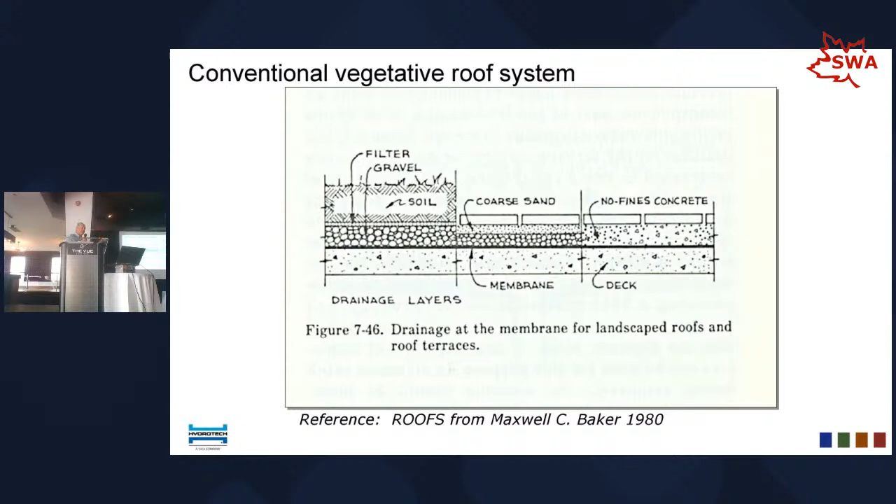So basically, vegetated roofs are not new. You got that from an old book. There's like the roofing Bible in Canada, Roofs from Maxwell Baker, written in 1980. Is it 1980? Yeah. And you can notice that the membrane is on the deck. So that concept of membrane directly on the deck has been around for a long time.

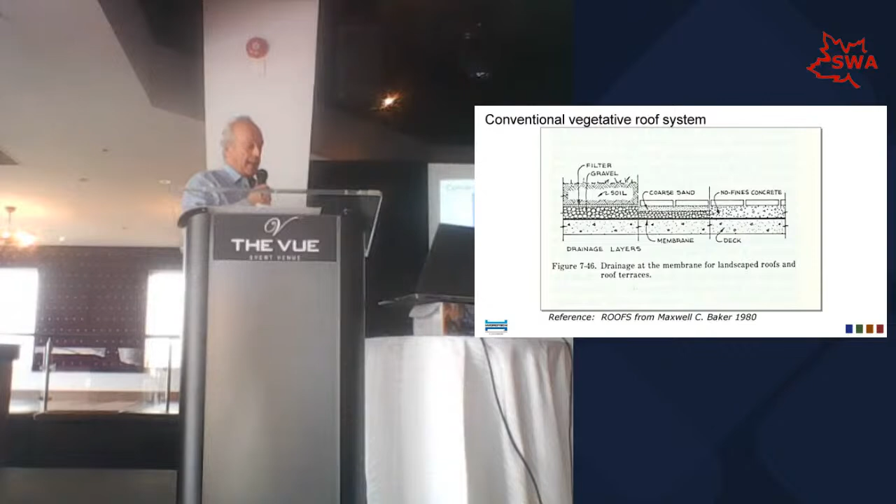Now, the extensive green roof, these are technology that we imported from Germany in the late 90s, like in 1998. So it's nothing really new. We just take all the knowledge from the Germans that they built up over all these years and we made them into a Canadian way. And that's been doing the work for the past 30 years.

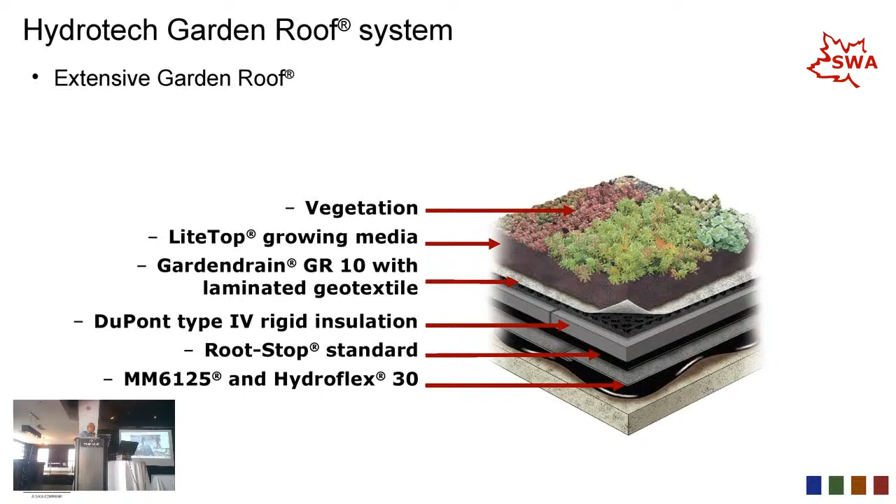Here again, the product we use mostly is rubberized asphalt. It's a monolithic seamless membrane, and when we talk about roofing membrane, we talk mostly about a waterproofing membrane. There's a difference between a waterproofing membrane and a roofing membrane. The waterproofing membrane is designed to sustain hydrostatic pressure for its design life.

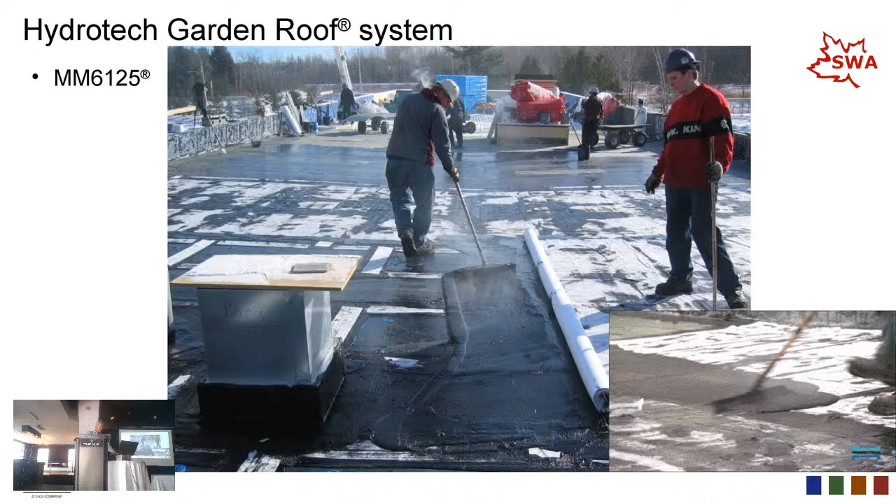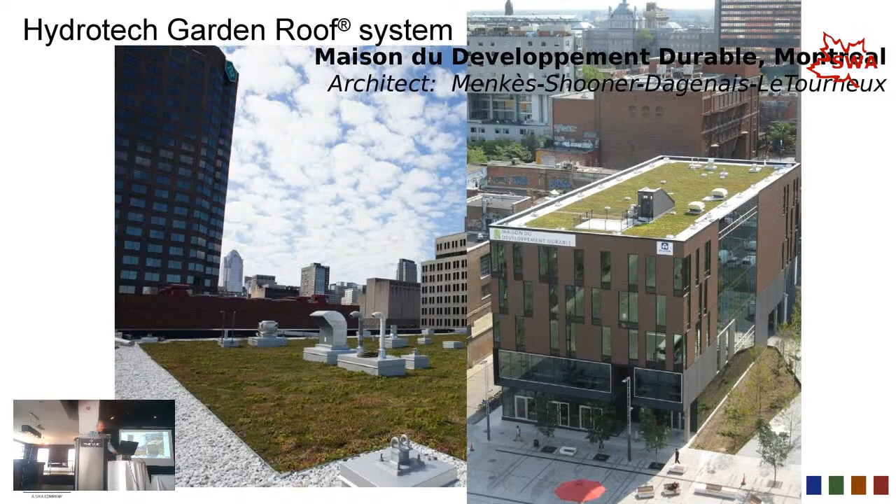First thing is training, okay, in your specification. For those who are writing specification, in the first part of the spec, we need qualification. So make sure that the contractors that will be installing the vegetated roof understand the vegetated roof: the roofing contractor, waterproofing contractor, and the landscaping contractor. So this is key for success. And now I'm going to show you some failure.

So you can negotiate with the contractor, but you cannot negotiate with nature. If nature doesn't get what it needs for the plant to thrive, it's going to die, and you're going to have this type of situation for the rest of the project.

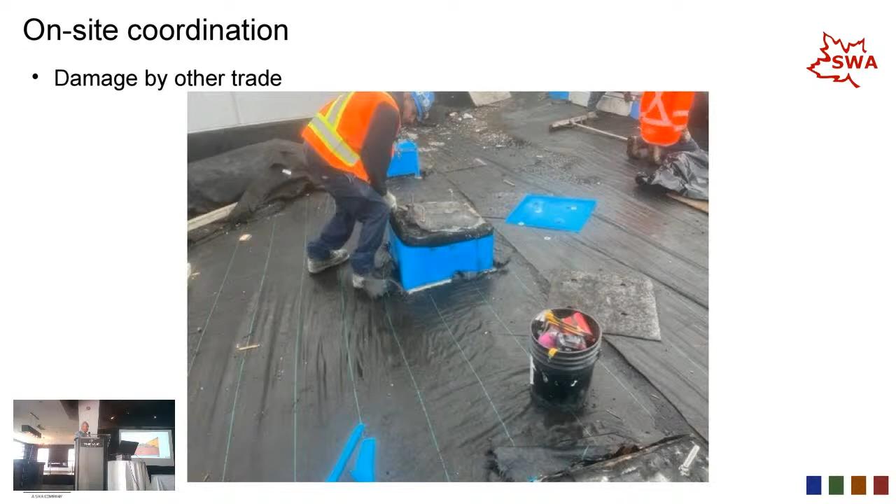Because they're gonna come up with scaffolding, the bricklayers, and ruin the vegetated roof. And this is what happened. And then we had to restore. We were able to save that roof, but at a lot of expense. So I want you to not do this again.

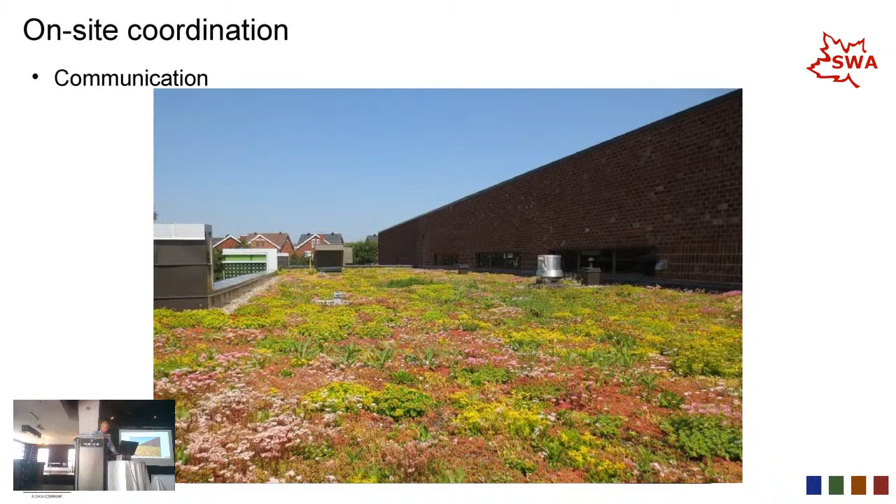Same thing here, downtown Montreal. We did that roof. It was nice and beautiful. We maintained that roof for a full summer, very intense at the beginning of the vegetated roof. Then in the fall, some other trades came in and they used it as a laydown area to put all their equipment and labor and so on.

And the next spring they called me and said, Denis, your roof is dead. I said, how come? So I went up to the roof and it was totally dead. So we needed to restore that roof. So keep in mind that the vegetated part is the last thing to go down, because these are costly mistakes. Here again, we were able to salvage the roof, but it was expensive.

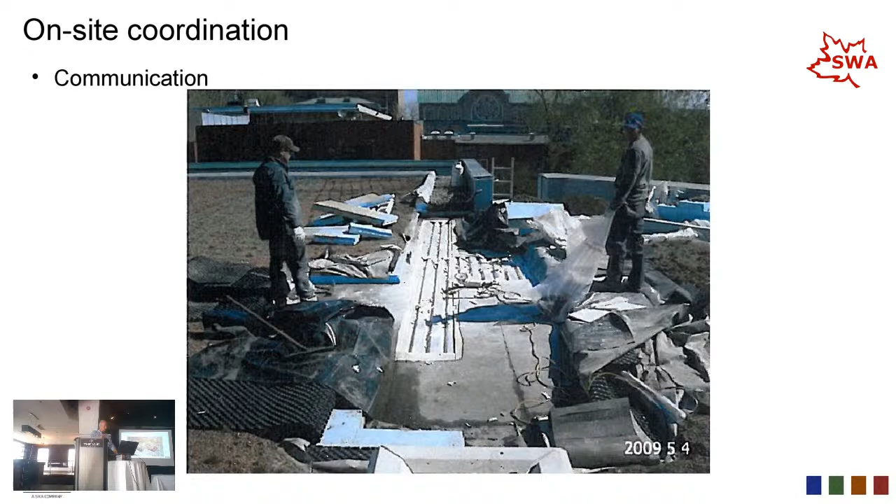This one is another one where the contractor had to put down a drainage board, and these drainage boards come in rolls, and they have a memory, they come back, so he took the initiative to nail it down. So he used nails, and of course the nails were longer than the insulation, and that was easy for the consultant to find the leak, but here again, that needs to be avoided.

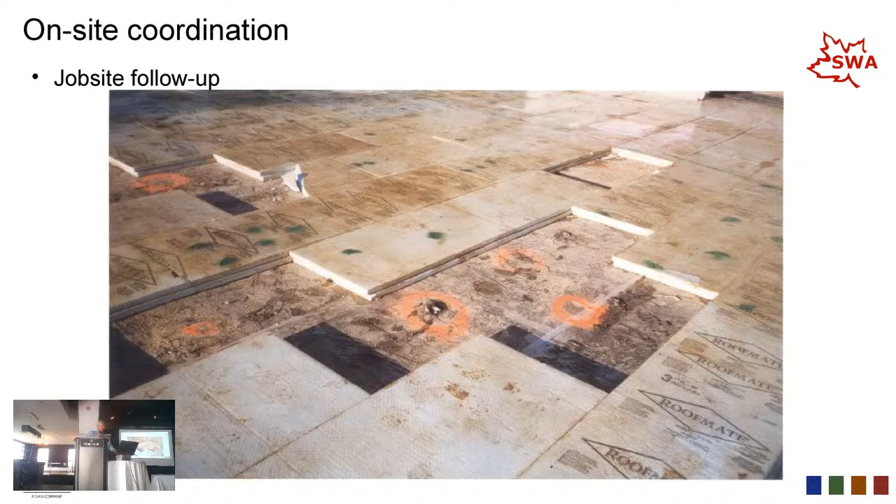In this particular case, because we're working with two trades here, and the filter sheet is in between the two trades. Who's doing the filter sheet? In that case, no one. No one was doing the filter sheet. So I happened to walk by that day and I could see the landscaping being done and putting crushed stone directly on the membrane. So if no one's there to pay attention, of course, that's going to leak within a year or two.

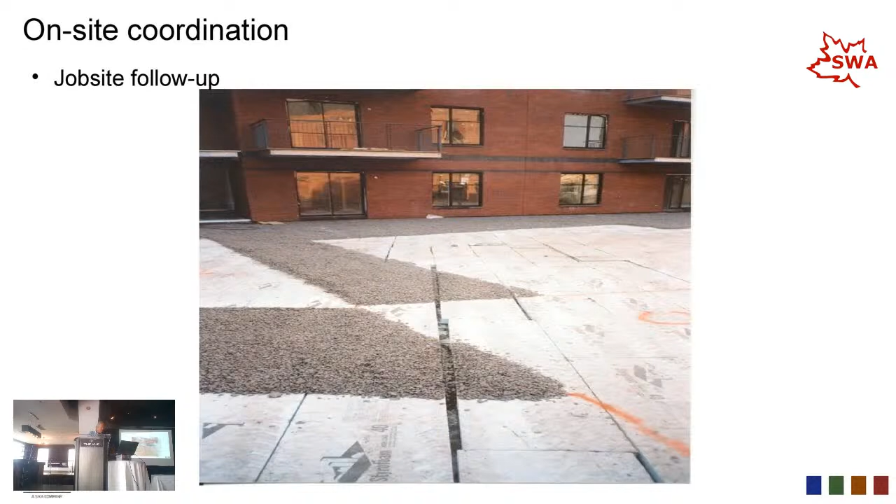And this is a dead roof, and it's always going to be dead because it's been built between 4 towers. So the sun never shines there. You need at least 4 hours of sunlight a day for the vegetation to grow. So I don't know what went through their mind when they designed that, but it's not our roof. Of course, some of these are our roof, some of them are not, but in that case, not our roof. And I don't believe there was any consulting with professionals on that job.

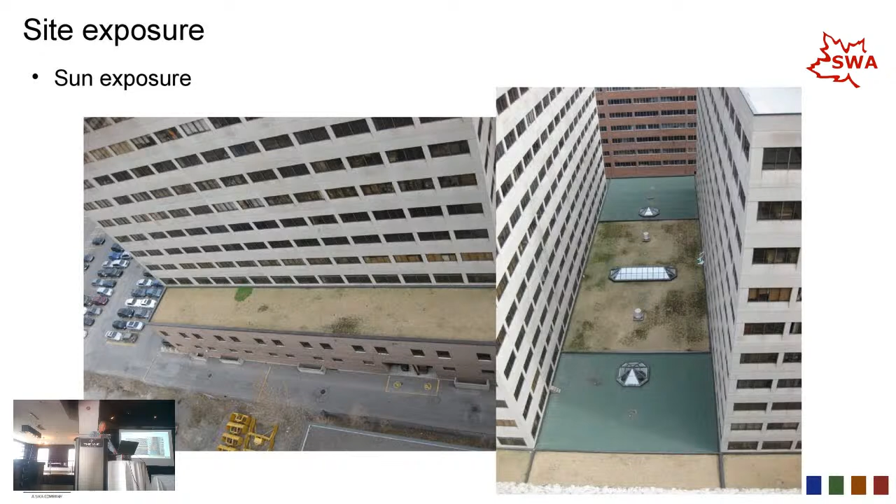On that project, there was some architect involved, but it's the solar radiation from the panel. It makes it really hot, so it's very difficult to have vegetation grow there. So you need to consider that.

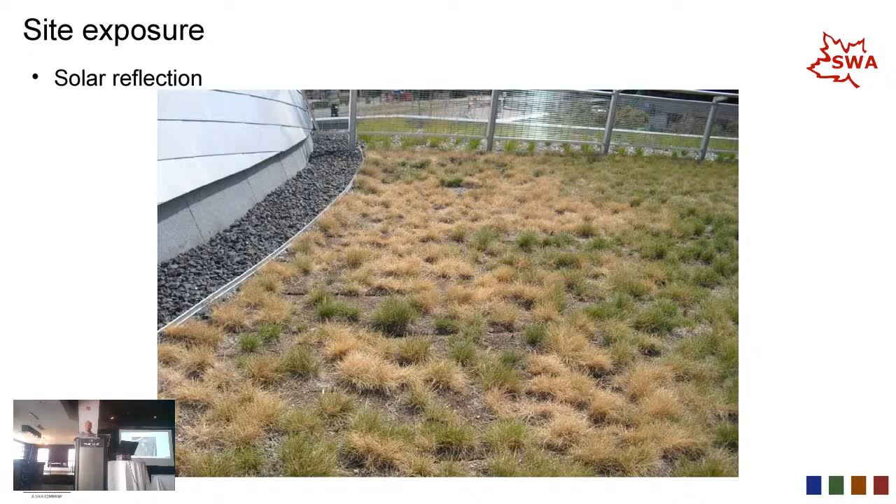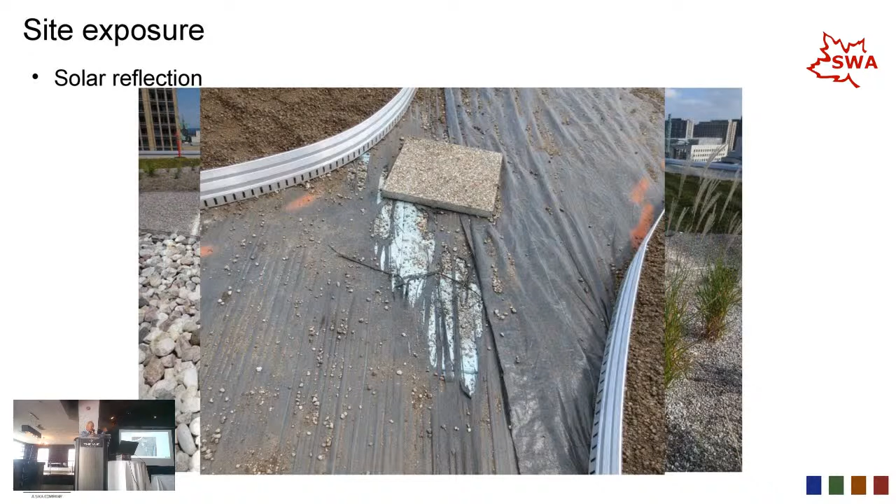This project was in Ottawa, and they called me and said, Denis, the roofing material is melting. I said, melting? They said, yeah, come and see this. So this is the filter sheet, and it's solar radiation from a building across the street. It makes like a magnifying glass, and it really burns the material. You can see it does a scanning over the whole day, and if you put your hand there, it would burn you. So this is also to consider.

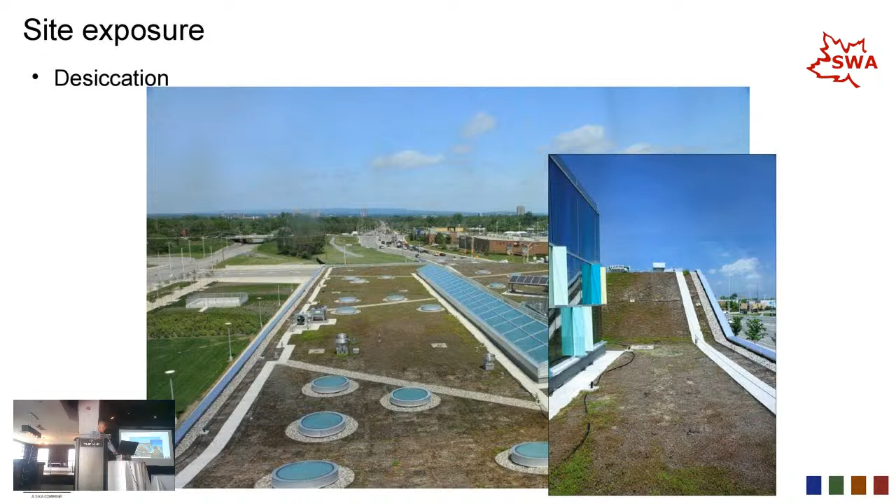This is wind desiccation. If you're near an airport or a big open space and there's a lot of wind, this will dry the plants. And if there's not enough moisture in the soil, the plants will have a hard time to grow. So this is site exposure.

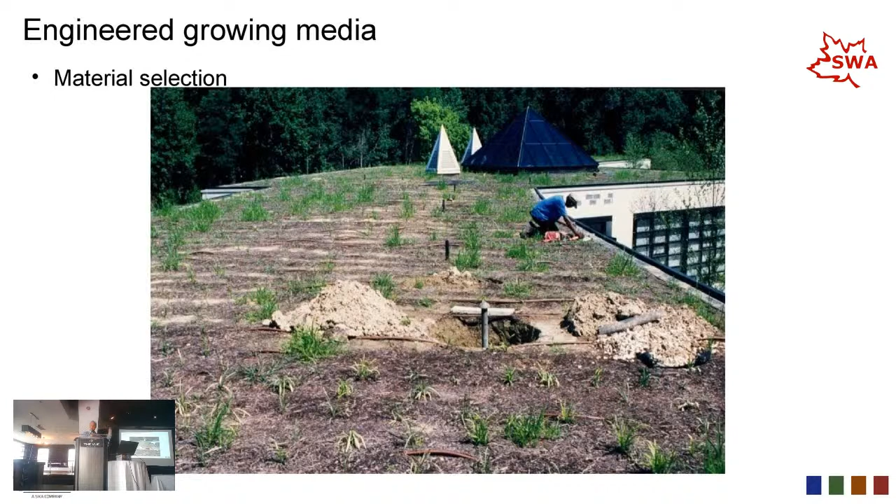In this case, that was way back in the 90s, not in Canada, in the US. For some value engineering, they used the excavation soil to put it on the roof. That was at the beginning, but it's a very stupid mistake. They used very highly organic soil. Like you mentioned, Bill, it needs to be mineral, at least 80% mineral, a little bit of organic. In nature, the soil is about 6% organic, so you don't need that much organic. In that case, it was way organic, you could see moss growing, there's no drainage, and the plants die.

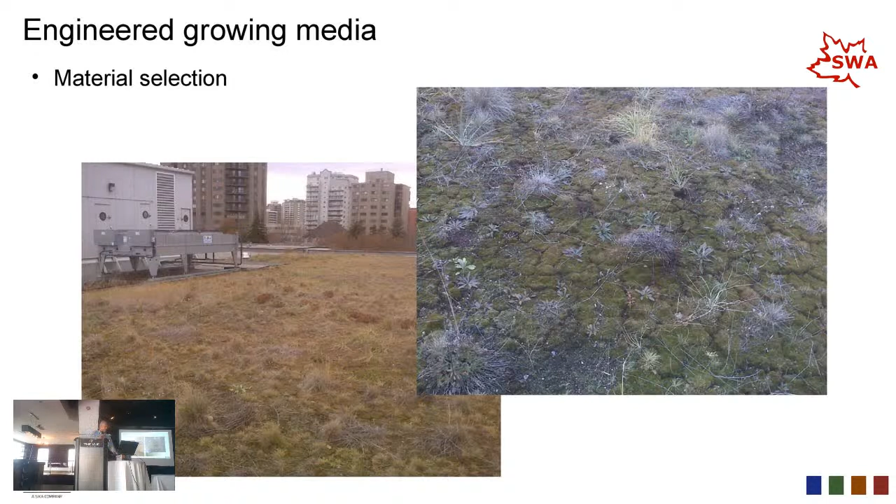And also, when it's too organic: this building is where you're not allowed to smoke, and this guy wanted to have a cigarette, so he went to the roof, threw out his butt, and the roof got on fire. So here again, there's a standard that came up, ANSI SPRI, a standard for fire, so you need to use a mineral soil.

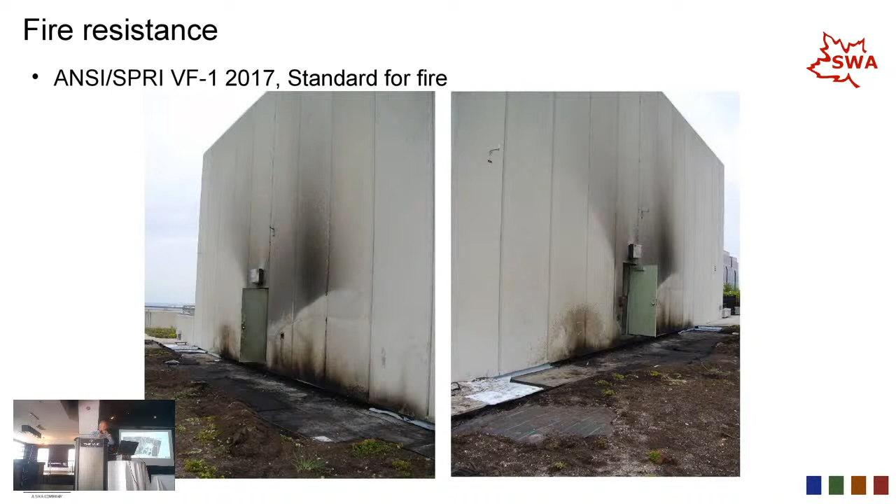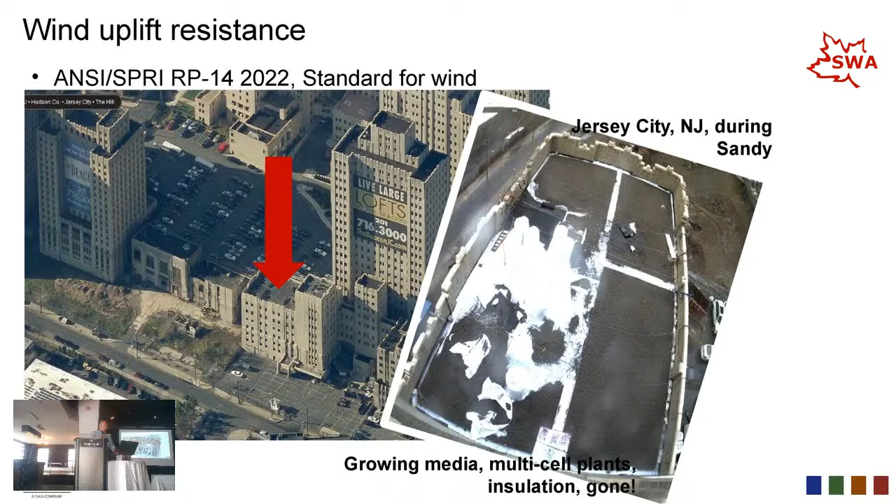Wind uplift, that's another issue. Of course, this is a very high wind situation, in New Jersey, Sandy, a hurricane actually. But in the same area, there were some vegetated roofs that did support the high wind. There's ANSI SPRI RP-14 for wind design, so you need to consult these standards when you design your roof. There's another one in Quebec City where you can see on the perimeter, this is where you get most of the wind turbulence.

And you're not supposed to have vegetation against the parapet. It's supposed to be a vegetation-free zone. But here again, there's a failure.

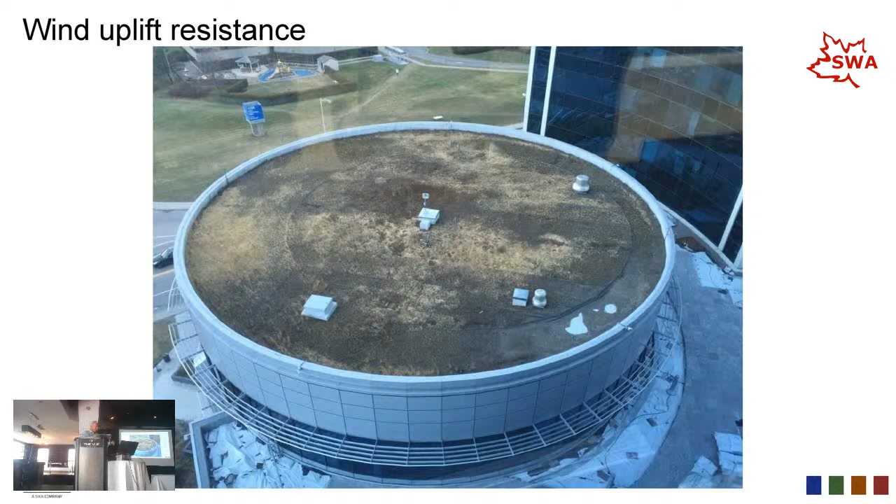So this is ANSI SPRI for the root barrier. We've talked about the root barrier. This is a little bit how it's done. They do those planters, they put the root barrier, and they put down bamboo with a very aggressive root system. They let it grow for 2 years. And then if they don't penetrate, then the root barrier meets the standard.

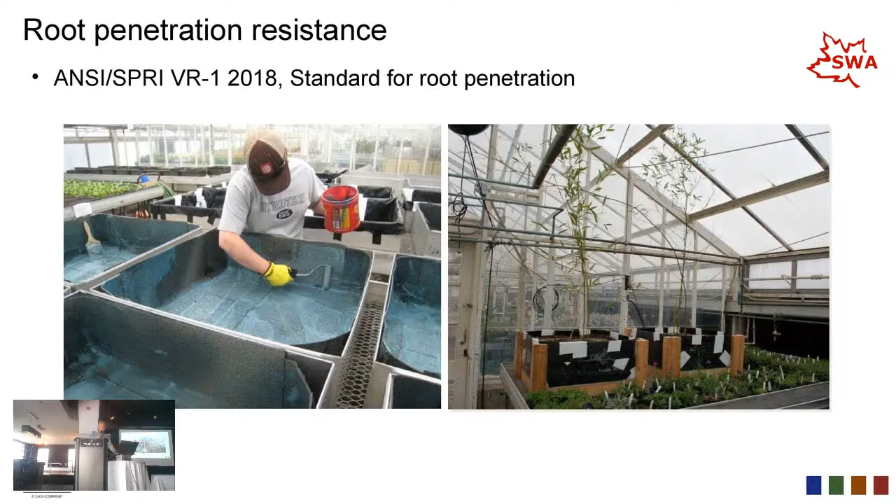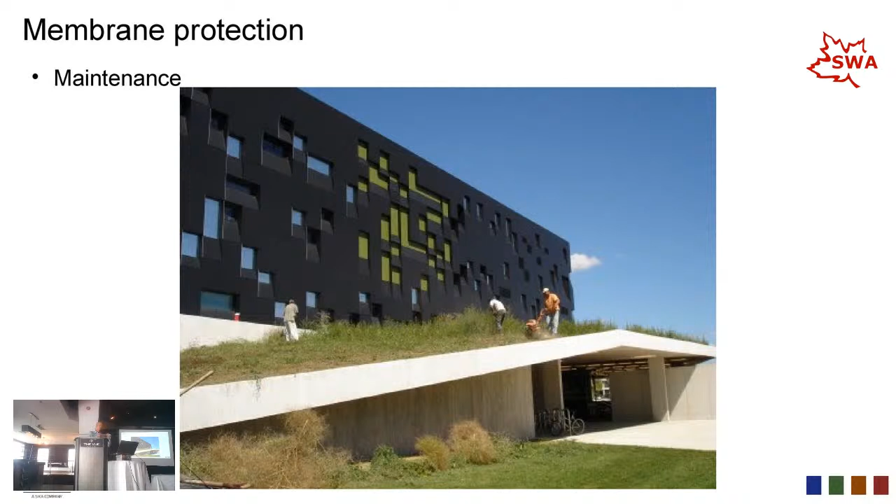And maintenance, here again, you need to work with crews that understand green roofs. I found that picture a little bit scary when you've got a rototiller on the roof there and you've got sensitive product underneath. So you need to always work with a qualified contractor.

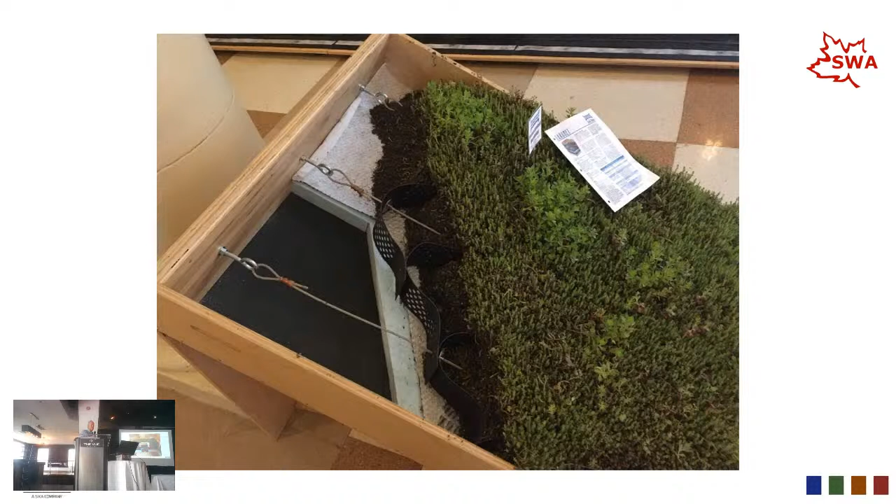And in closing, these are little components like the checker block, they're made of concrete where you can extend your vegetation into the high wind area of your roof to ballast the roof. And I've got another slide for sloped application, and also the next thing, because of climate change adaptation, stormwater management in Toronto, Montreal, Halifax, every big city, our system cannot withstand all those big rain events.

Now we are asked to have more water kept on the roof, so we've got those controlled flow drains. We've got these Permavoid there to capture the rain, so it adds additional water retention to the system. So basically, that was my presentation. So we're going to move on to the question period.

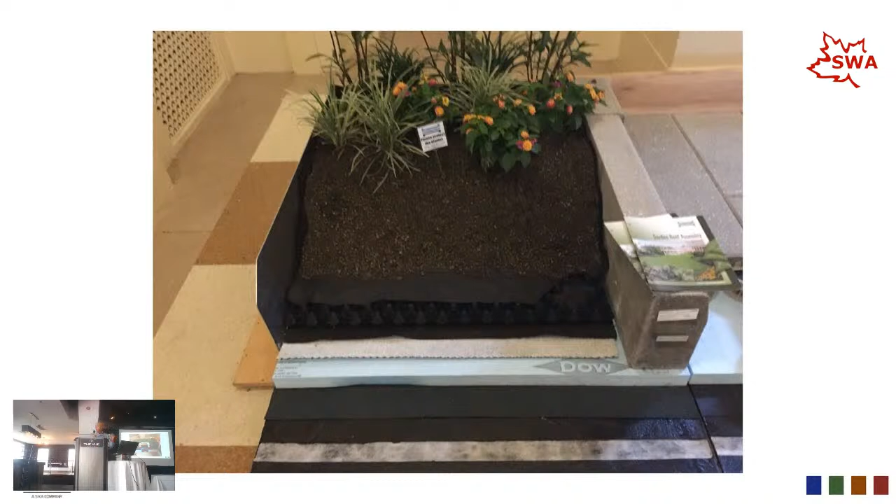Yeah, excellent presentation, all three. Boy, is that really loud or what? So yeah, if any immediate questions come to mind, feel free, Bill.

Yeah. Winter. So how do these things do, especially with freeze-thaw, where the ice doesn't totally melt and then refreezes and then snow falls again? Well, for the plant selection, we select plants that are adapted to our climate. I mean, not climate change, but climate zone. So the plants that we select can withstand those freeze and thaw cycles and so on.

It's not a problem. You as the manufacturer, are you guys selecting the plants, or is the landscape architect? It's the landscape architect, but we can help them, but that's their role. The landscape architect makes the plant selection. But he can always consult with the manufacturer. Some of the manufacturers have an in-house landscape architect or agronomist that could help support the landscape architect.

Okay. The other question is the weeds. Like weeds, the pollen, everything is in the air. I mean, how do you prevent noxious weeds from taking over? Well, if your vegetated roof is nice and healthy, it's going to be very dense, and it's going to be difficult for weeds to establish themselves. If your roof is in bad condition, then you're going to have infestation. You're going to have weeds coming in for sure.